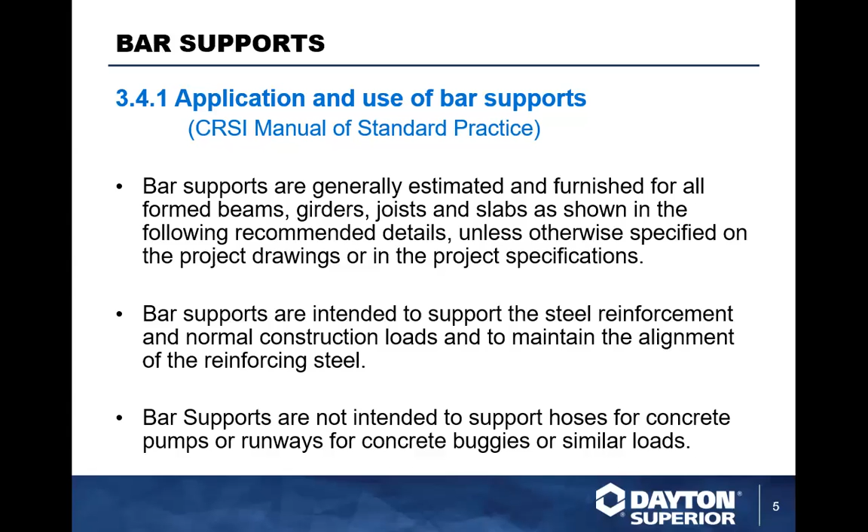Bar supports in place. Typically, you're going to want to make sure that you have a bar support going in place that can support the bar in position and can be tied off. And two, that it has openings in and around it to allow concrete to flow freely in and around it, so you don't get any honeycombing in and around the product.

So you want to make sure that you fill all the voids around the concrete, because you don't want water to accumulate there. And on days like today, if you're in the northern half of the country, you'll understand what I'm saying. Because if water's in the concrete today, it's ice, it's frozen. And when water freezes in the concrete slab, it does create a major problem.

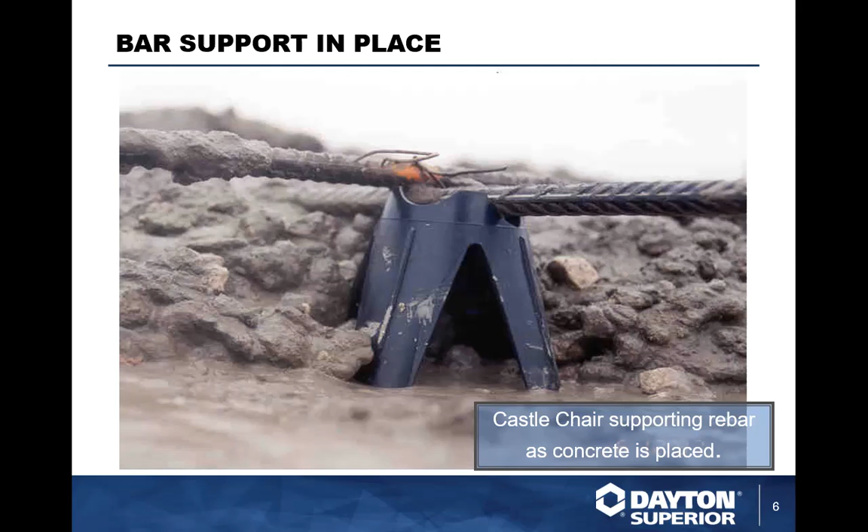So you've got composite bar supports being used in pretty much most of the projects here. Composite bar supports actually started becoming a major item back in the 1970s, when mostly it was all metal bar supports that were used, but because there were problems with getting steel, etc., plastic actually started coming in.

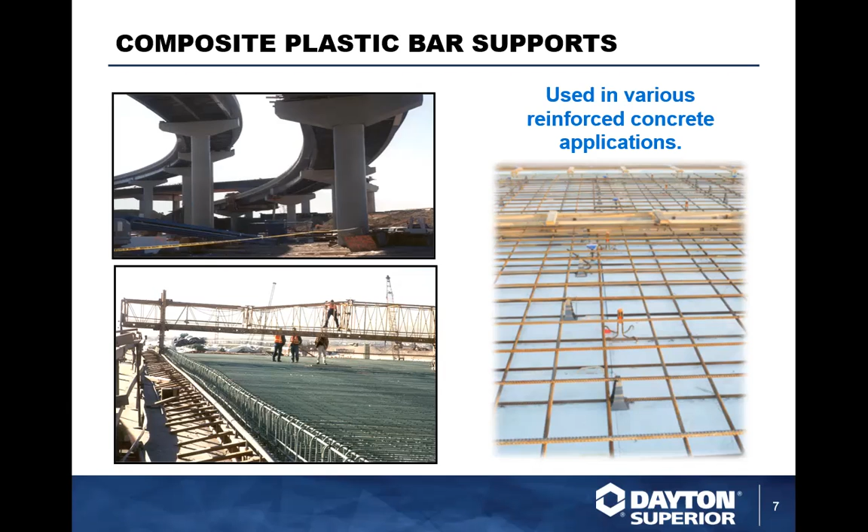And the plastic bar supports are, I'm going to say, as good as, if not better than, the metal bar supports. There are a couple of different reasons for that, and we're going to talk about them. They're non-corrosive. You don't have to worry about them rusting. If they get knocked over, no harm done.

They can be a little more expensive, but they can also be a lot less expensive than, let's say, an epoxy coated plastic dip material or even epoxy coated. One of the great things is they are a concrete gray in color.

They are lightweight. If you ever watch an iron worker carry out bar supports onto the deck, they will typically grab a couple hundred feet of metal bar supports in their bundles and carry them out.

Plastic bar supports enable a guy to grab like 600 or 700 feet of bar supports if he can carry all the boxes and carry it out. The biggest problem they have is getting rid of the cardboard box at the end of the job.

One of the great things about plastic bar supports is that it's recycled material. This material is that old milk bottle, that old water bottle, that old soda bottle that you had running around.

You threw it into the recycle bin. This material typically has basically found its way back into being recycled, repurposed into a bar support.

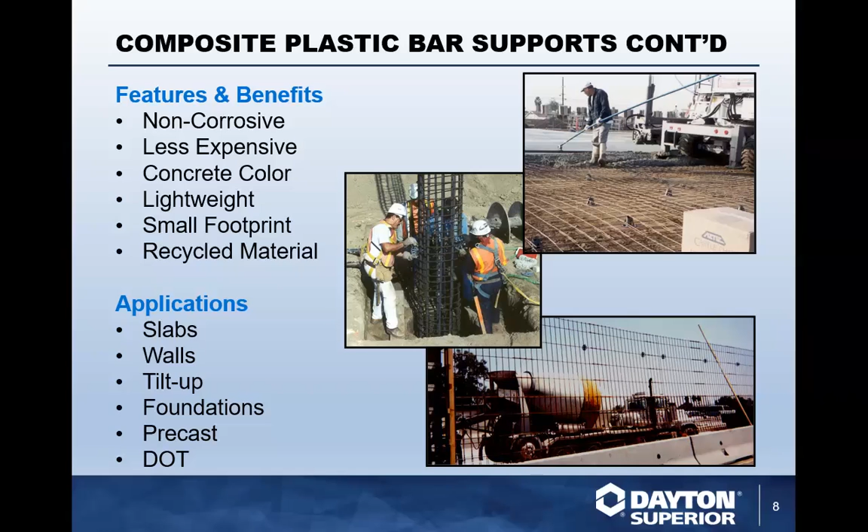So with Aztec, Aztec's been around a long time. Dayton actually acquired them in the late 90s.

Aztec Plastic Company out of California was a manufacturer primarily of about 10 or 12 different Aztec product pieces, and some of those are still in existence today.

The easy chair, tower chair, castle chair, paving and sand chairs, X chairs, and as you can see, the list runs on. We've got easy lock wheels, plastic slab bolster upper.

Slab bolster and beam bolster. We also have easy lock slab bolster, and we have concrete dobies that also fall under the Aztec product line.

Dobies, for those of you that are not familiar with it, are big hunks of concrete blocks. They're very, very heavy.

And they typically can have a wire connected to them or little knockouts in them where they can hold the rebar in place.

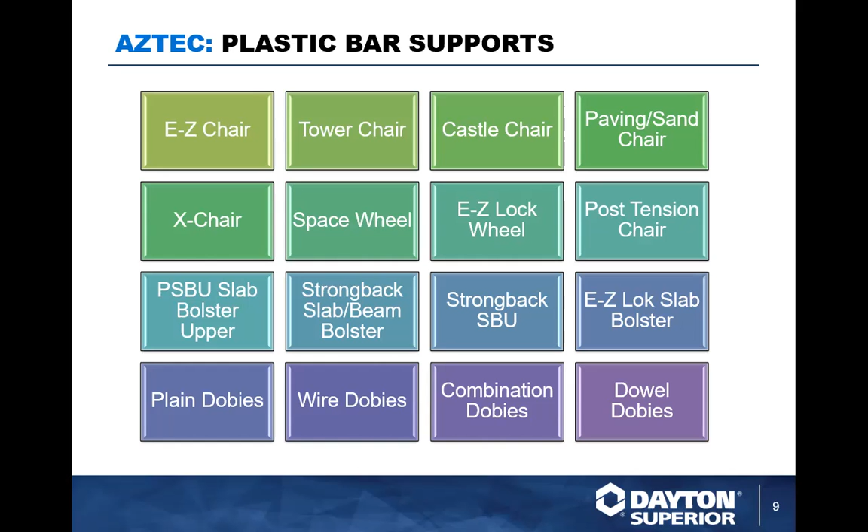So what size support should I use? Usually an engineer will specify it.

The engineer will specify what concrete coverage he wants from the floor surface to the bottom of the rebar. When this comes through, that is typically the coverage you have to have.

So if you order a chair right here, 3 1/4, the chair will go in place and support the rebar 3 1/4 inches off of the sub-grade.

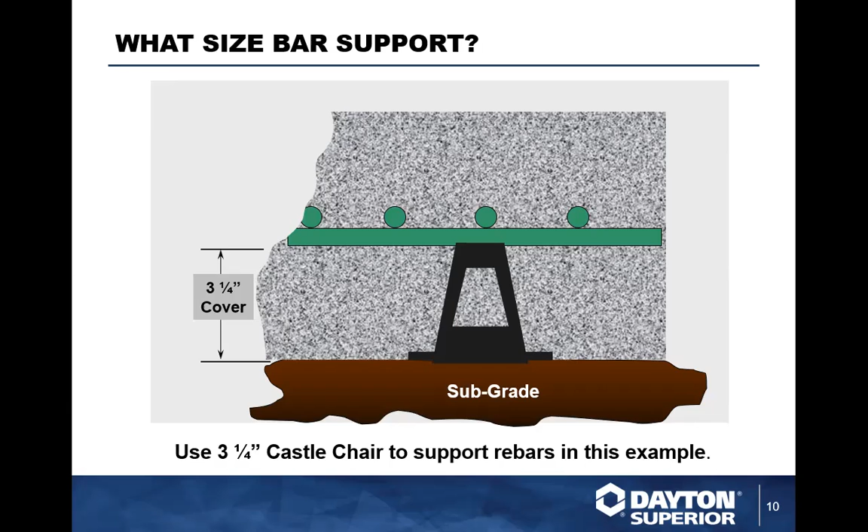Now, for that, our best seller that we have is the Castle chair. It's typically an on-grade single mat rebar chair or wire mesh chair.

The bottom layer actually has a wide base on it, a circular base, about 1 inch to 1 1/4 inches wide, and this enables you to give a good support to that chair.

So it's a great chair for when you're having slab on grade or concrete fill. It's available up to 6 1/4 inches in height, in 1/4 inch increments.

The other great thing about this chair is it's dual sided. So basically, if you have 1 1/2 inches on one side, you'll have 1 3/4 on the other if you turn the chair 90 degrees.

So basically, you can get one chair that will do two different sizes.

It depends. Basically, all you have to do is just rotate the chair 90 degrees, so it depends on how you want to turn the chair.

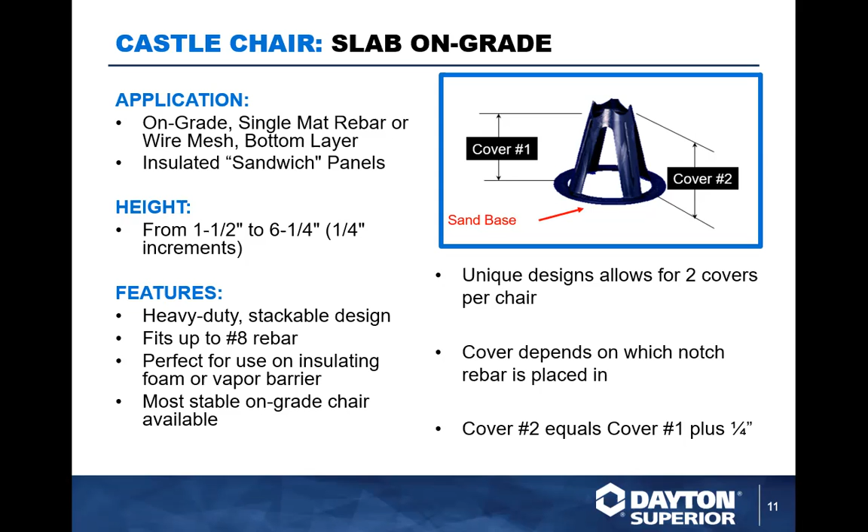What it does is, right at the intersecting points where the wire mesh intersects, you can actually put this chair and attach it to the wire mesh.

If you have to move the wire mesh for whatever reason, you can pick it up and the chairs will stay attached to the wire mesh. This enables you to basically pick it up, say you're doing an elevated platform and you've got wire mesh going down, but you've got to either put something underneath it or oil it or use form release.

With that product, you can pick the wire mesh up, move it, and then bring it back and set it in place, and the chairs are all ready to go.

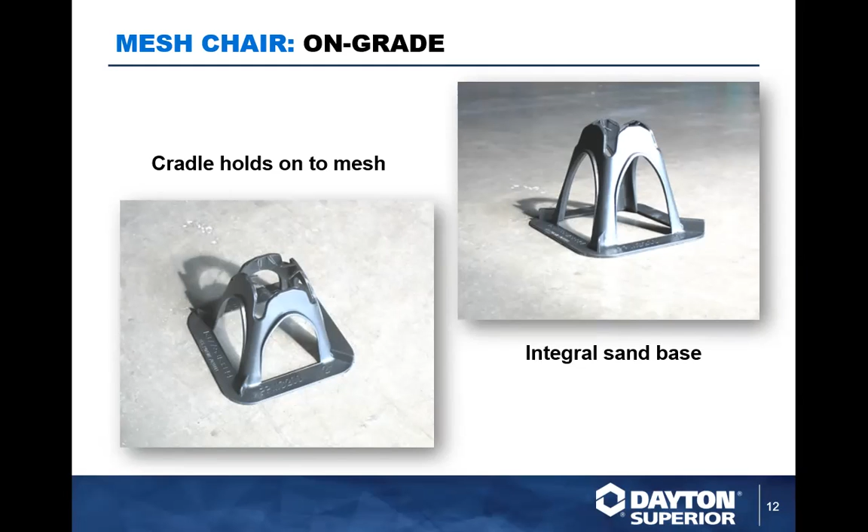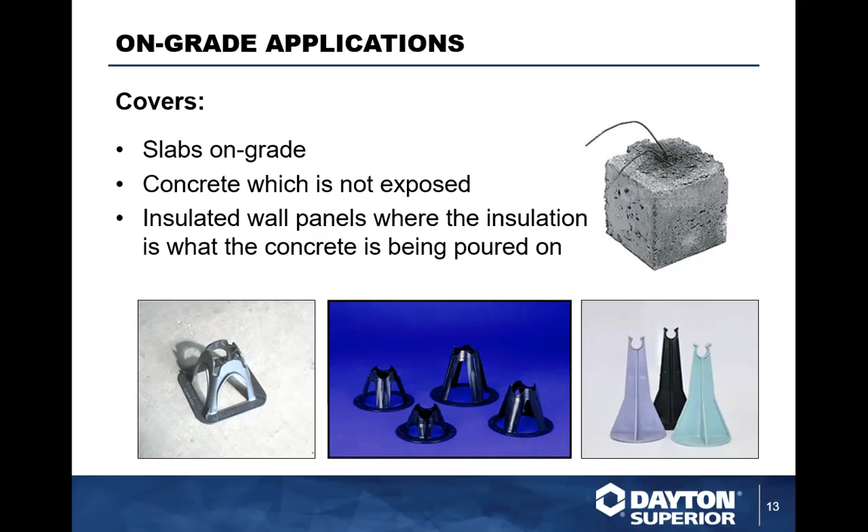Also have concrete dobies. As you see, any of these on-grade applications, concrete dobies on the West Coast and actually in the south central part of the country are becoming more and more popular. Basically, it is a concrete brick, a sand and shale mix, concrete mix, either with wire or without wire, and basically will support your rebar. We've actually used this in conjunction with a lot of our plastic chairs to accommodate, depending on what size rebar, etc., are going to be required.

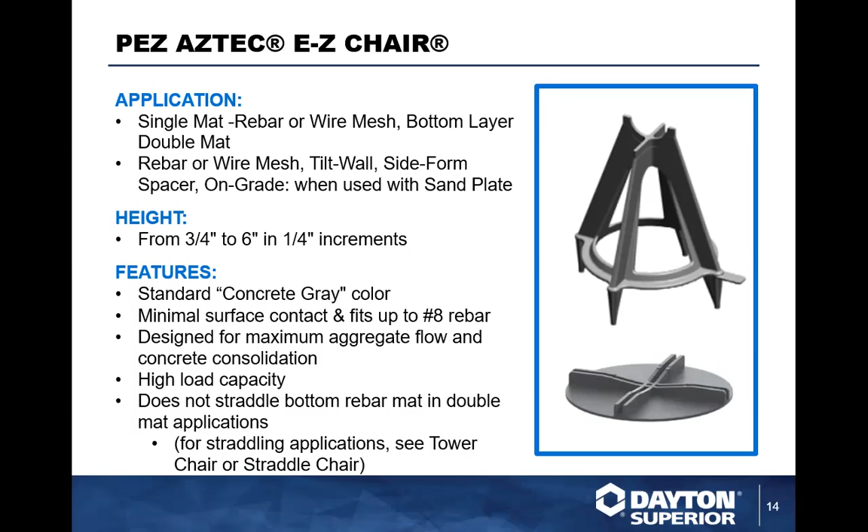Now, if I look at a lot of the plastic chairs, the E-Z chair is probably one of the most legendary chairs in the marketplace. This chair has been used for 45 years by bridge contractors, high-rise developers, anybody pouring multi-floored projects. Bridge contractors typically like it because they can use it out on the fascia of their overhang. It has a very small footprint, it's concrete gray in color, and this chair has extremely good concrete load bearing, it'll withstand loading in this chair. You can also get this chair with a sand base if need be.

The Aztec chair, this chair here is one of the strongest chairs in the marketplace. Single mat or wire mesh bottom layer can be straddled because of the design of the legs on this system. This tower chair here, actually when I first came on board with Dayton Superior at the World of Concrete, we were showing Aztec in our booth, and we actually had a brand new pickup truck sitting in the middle of our booth with 4 of these chairs supporting the pickup truck. So that's how strong this chair is.

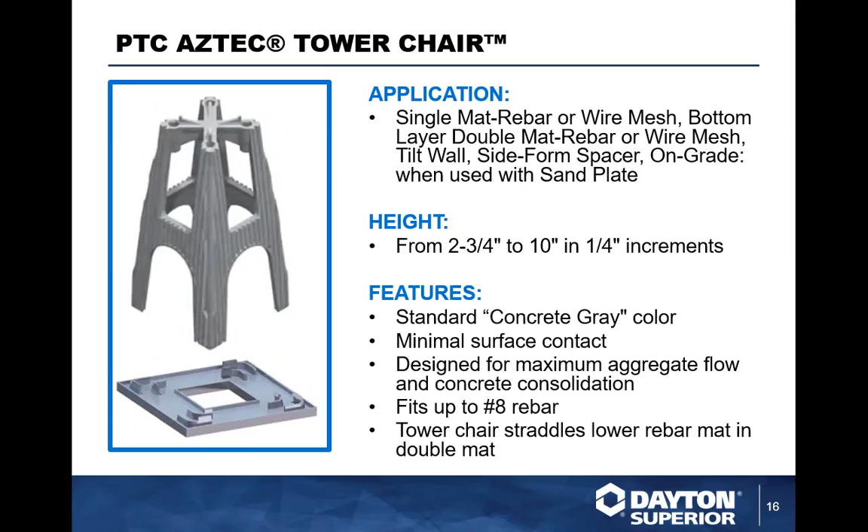This chair here has been load rated somewhere in and around 700 to 800 pounds in ultimate strength. In our office here, we like to say that it passes the chuck test. Typically it's standard gray in color. You do have a sand base with this also.

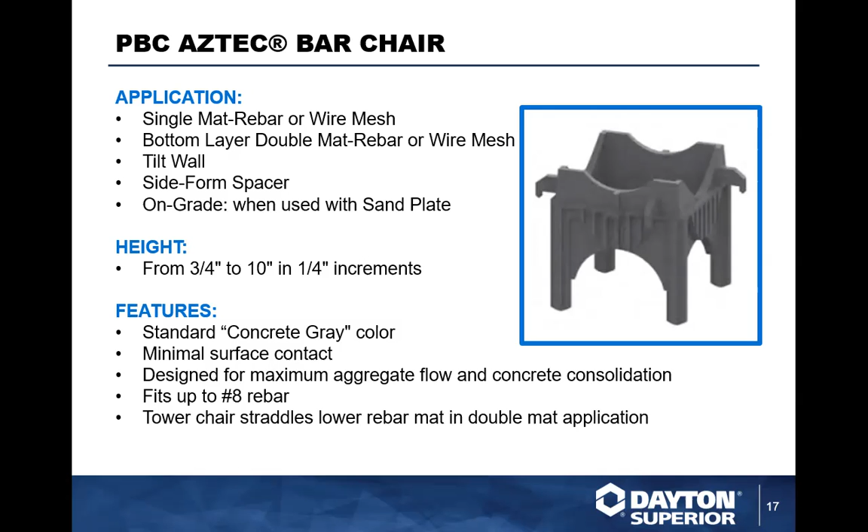You can also have the bar chair, which will actually attach to the top of that tower chair to get an extra 3/4 inch to 10 inches. You can also use the bar chair as an individual freestanding chair. It is dark gray in color, with minimal surface contact, so once again, very small footprint. And you can see here it's accompanied with the tower chair to actually accommodate.

Where we see a lot of this being used is when we have slope slabs. So parking structures, etc., where the concrete may vary in thickness, the slope slab will actually take into place different elevations of the rebar. So instead of changing all the rebar chairs, you only have to change the one top chair.

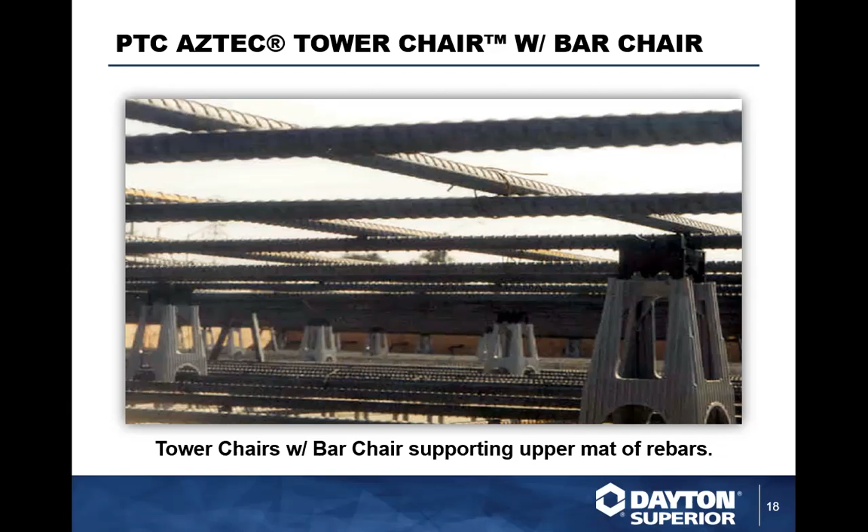For the paving contractors, we have paving chairs, which typically will grab hold of one rebar. Since all the rebar mat is connected with it by tying it, you can actually support multiple pieces of rebar with this one chair. Typically, these are going to be spaced somewhere in the range of about 3 foot on center. You can get heights up to 9 inches in height, which makes it ideal for concrete paving.

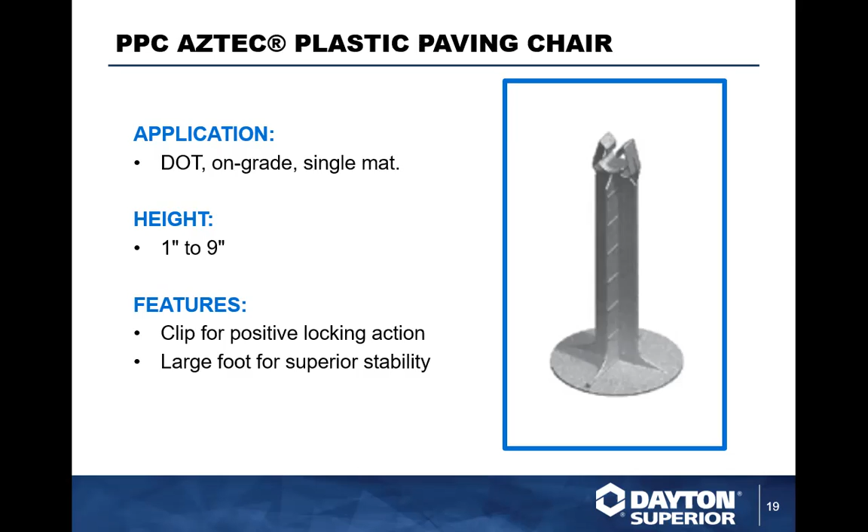We also have a snap-on mesh chair. We see a lot of these being used, similar to our other chairs. The R22, a lot of this is contractor preference. This one here has a solid base on the bottom, still clips right onto the wire of the wire mesh. Can get up to about 6 inches in height. We see most commonly somewhere in the range of 3 to 5 inches as our maximum usage products. So we see a lot of these being used in our sidewalk construction.

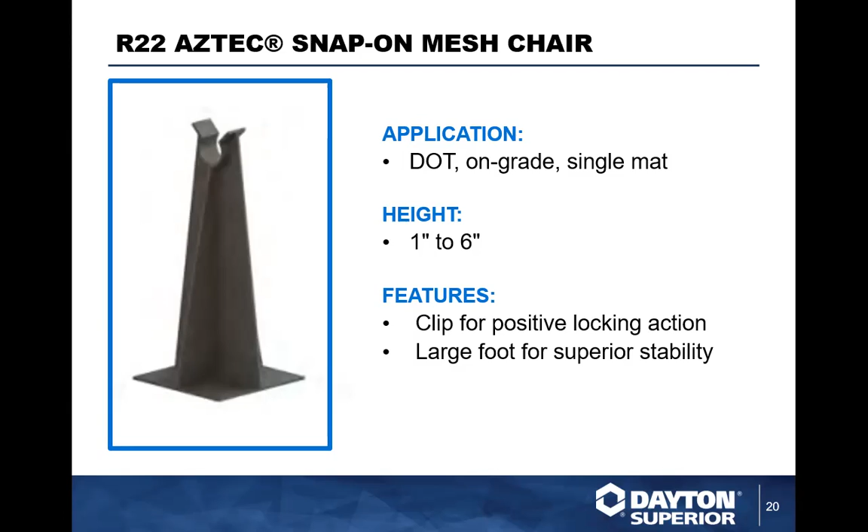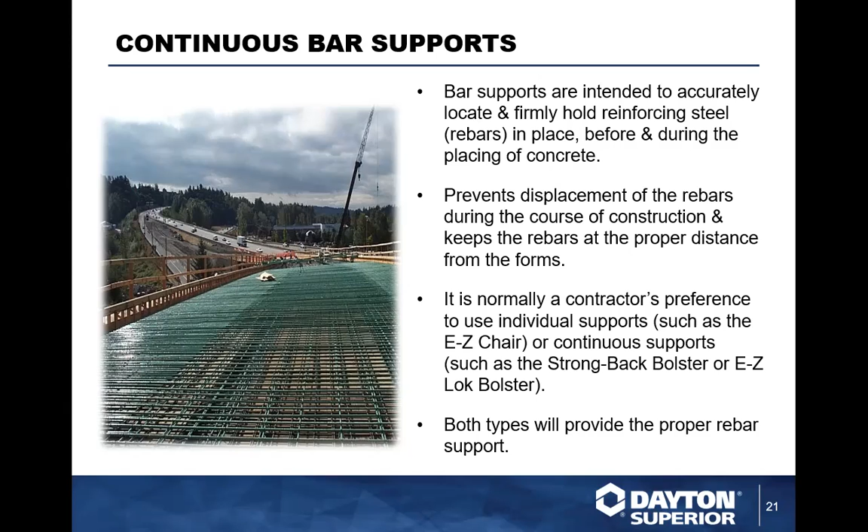Continuous bar supports basically are intended to accurately locate and hold reinforcing steel in place. The rebar is kept because it's now going to be a major component within the structural slab, being your bridge deck. So normally the contractor's preference is to use individual support such as E-Z Chair on the fascias. But for the rest of the deck, most contractors prefer to use a continuous slab support, which is just a long bar support. If it's in a plastic mode, it's 2.5 feet, whereas if we're talking a metal chair, it's 5 foot in overall length.

So we have our Aztec strong back slab and beam bolster. Typically, this is for an elevated slab, typically 3/4 to 3 inches.

Typically, we can support up to number 10 bar on this chair. The biggest problem you have is when they drop the bar on the chair. Plastics typically don't handle a high impact load well. If you place a heavy rebar on this, you're good, but if you drop it, you may have a problem.

Cold weather or hot weather instances can also lead to that issue. But most of the blends we use with our cold injections have eliminated the variances we get with cold weather and hot weather.

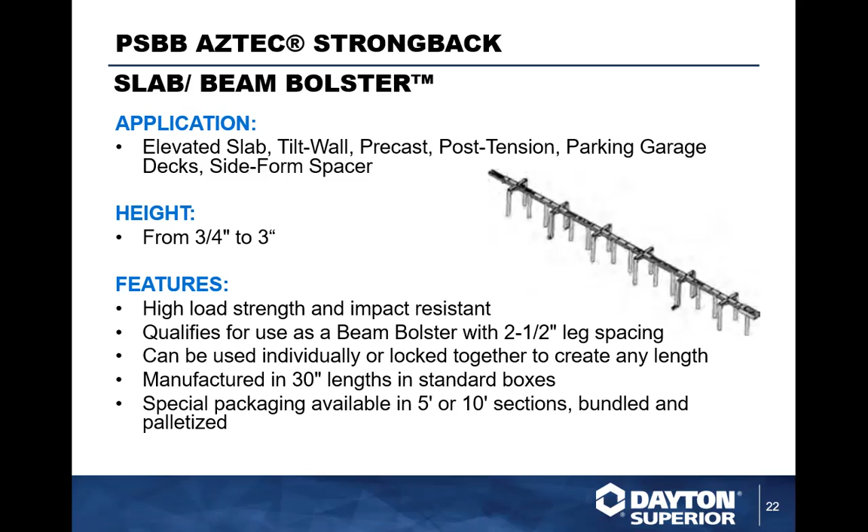Slab bolster upper, typically up to 5 inches in height. This is an extremely strong slab bolster upper material. The base allows you to span your SIP decking or top mat of rebar.

You can also connect these continuous bar supports - Aztec is a great product because they all have clips on the end. One end has a receiver, the other has a clip. You basically punch the two together and you have one continuous piece.

Now on metal bar supports, when you're estimating, you typically have to add 10% for lap length. With plastic bar supports, you have 0% to add for lap length. So whatever true number you come up with for what you need, that's the number you use - you don't have to add any extra for lap.

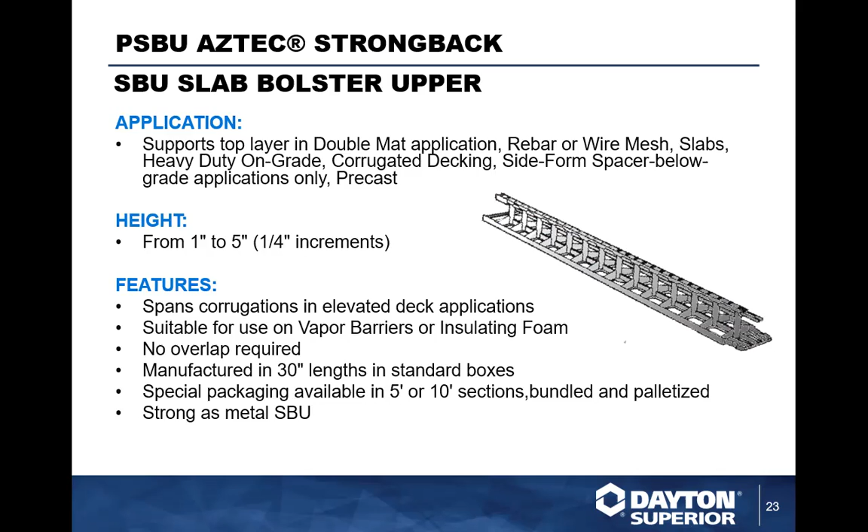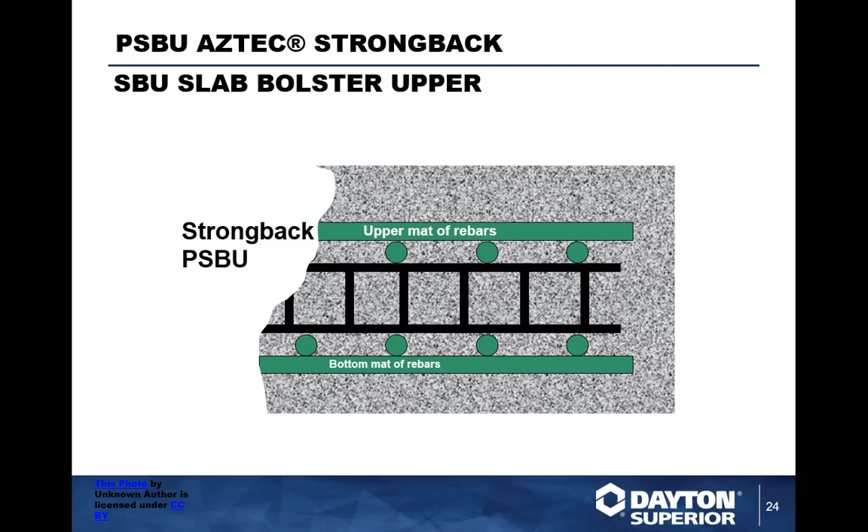So for slab bolster upper, typically you're going to have your bottom mat going in place here. A lot of times the bottom mat may have individual chairs. The upper mat will be supported with an upper material, basically to suspend between the two pieces of rebar, or it may be supported on an SIP decking if it's a bridge deck.

Typically it will slide onto the piece of rebar and make the connection. The one problem you do have with it is if you hit it just right, it will fall off, because it's designed with that clip to be able to be taken off and moved if needed on the project.

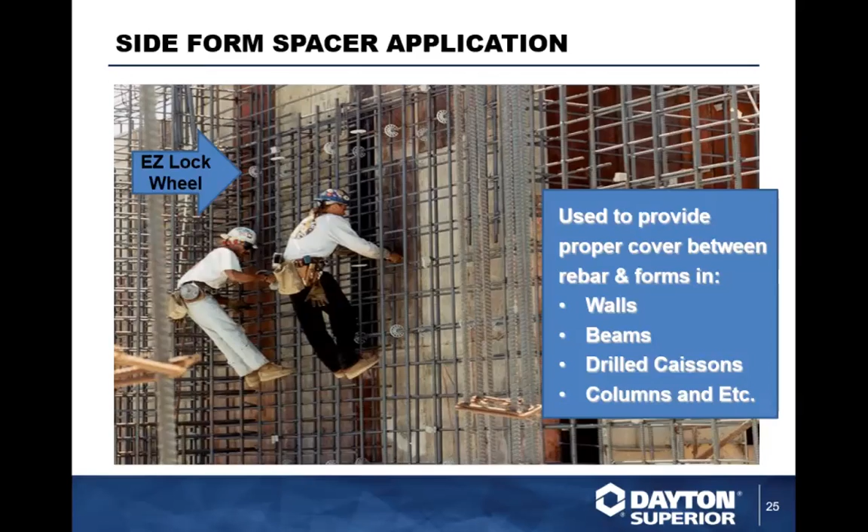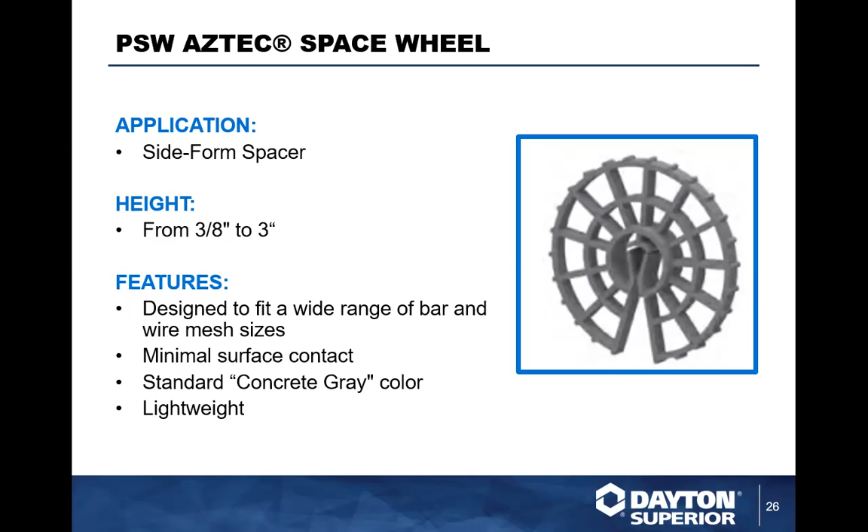Now we've got the E-Z Lok wheel. This is a much stronger unit. It has a locking mechanism, so once you wrap it on top of the rebar, it is connected. It comes up to what we call a height from 1.5 to 6.5 inches, depending on bar size.

And it's from the edge of that cage right around the center of it - once you make that connection, that edge distance is from that edge to this outside edge.

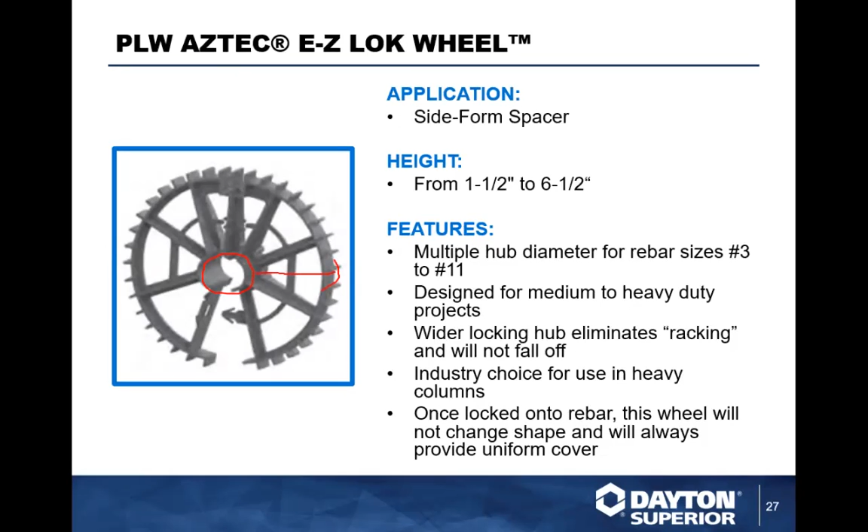You should draw a picture of a flower too. Yeah, or a Ferris wheel - that's what those remind me of.

Concrete dobies - basically concrete mixed with shale used to make concrete bricks. Typically we see them in the South Central and the West Coast. Primarily the reason we don't see them anywhere else is that's where they're mainly made, and freight on these is astronomical, so they typically stay close to where they're being manufactured.

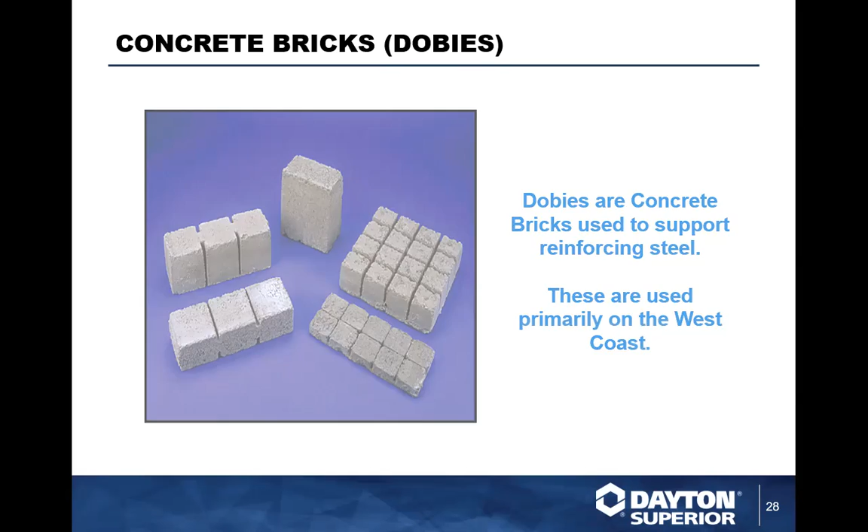But they have a couple of different sizes and styles. We have the plain dobie, a combination dobie, wire dobies, and dowel dobies. The most common ones you see are the plain dobie and the wire dobie.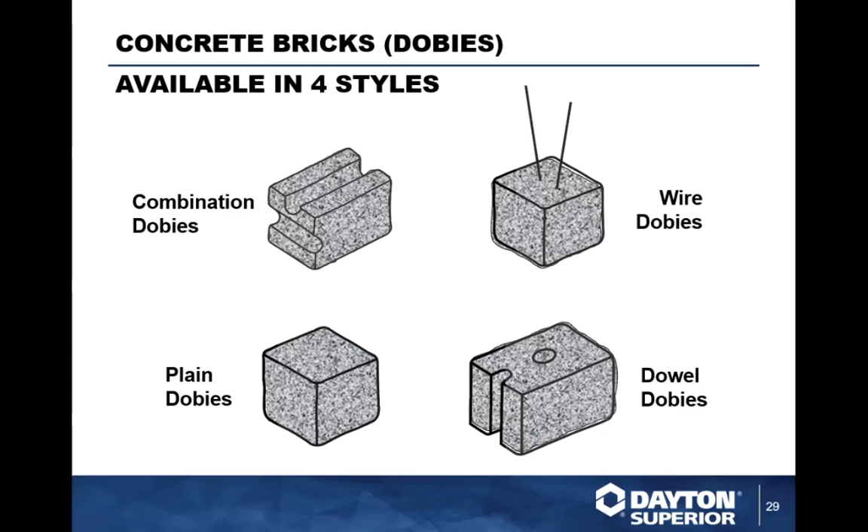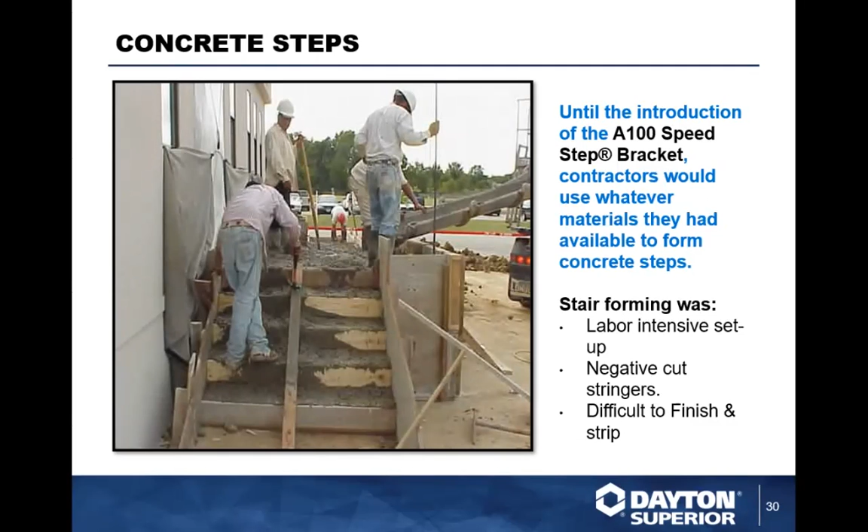One of the other things Aztec has is our Aztec speed step. Typically for designing steps, forming up is probably one of the more cumbersome processes on a construction job, so this enables you to speed up that process going forward.

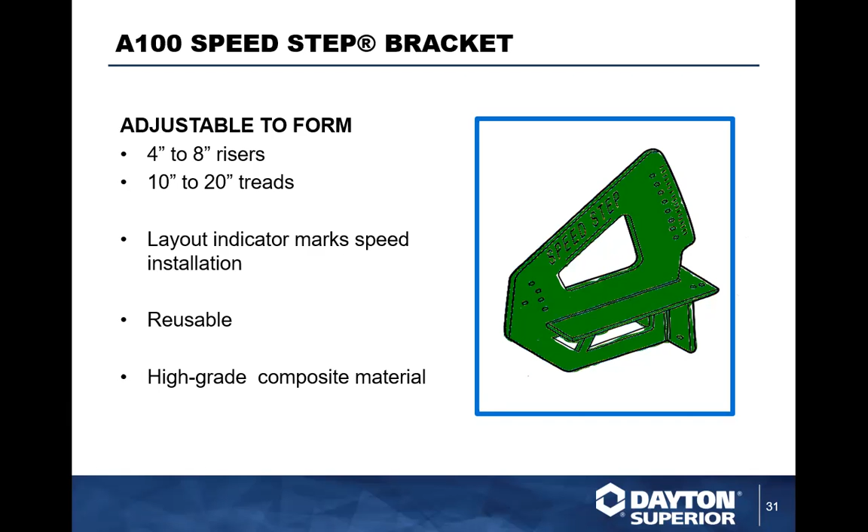You can have rises up to 8 inches on a riser, 10 to 20 inches on the treads, without an issue. It is fully reusable. It's a high-grade plastic composite material. It does make the construction or forming process a little bit quicker and easier.

So when we're talking about connecting here, we're going to connect a main line board that runs the gamut of the steps from top to bottom, and you're going to put a center line on the board. This is going to make the connection.

Once you make the first connection, you'll notice there's a gauge on it. You mark those at your numbers on the gauge - that's going to be the same one when you go to the next step up. So it's a repetitive process moving forward.

And it does help with the stair run and rise, and you can actually attach a kneel board on top of it so the contractor can kneel on it while he's finishing his stair rise and run. That enables everybody to increase their productivity when they produce a step situation.

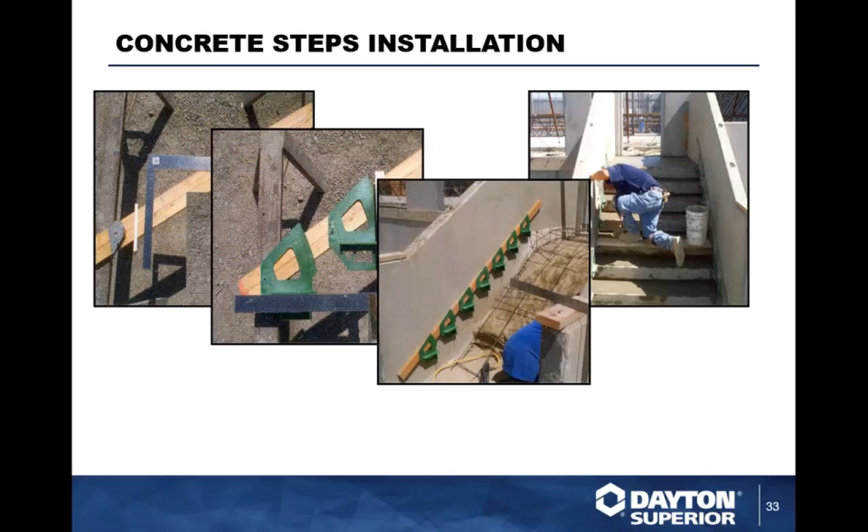Here we've got full guidelines on how it actually goes into place. You can see how it lines up here inside. Then they just attach their rise boards and start pouring concrete from the bottom, depending on the contractor. Some pour from the top down, some from the bottom up. Myself, I like to pour from the bottom up, keep working my way up as the concrete keeps pushing down, keep troweling it off and ready to go.

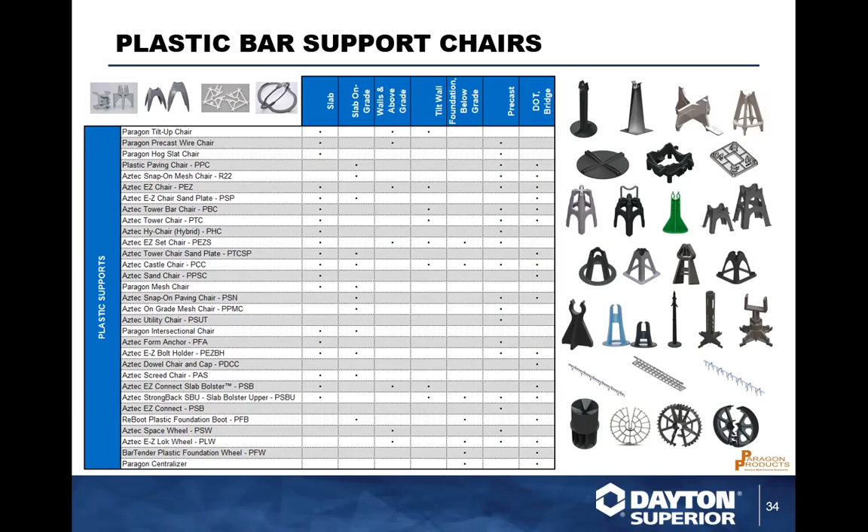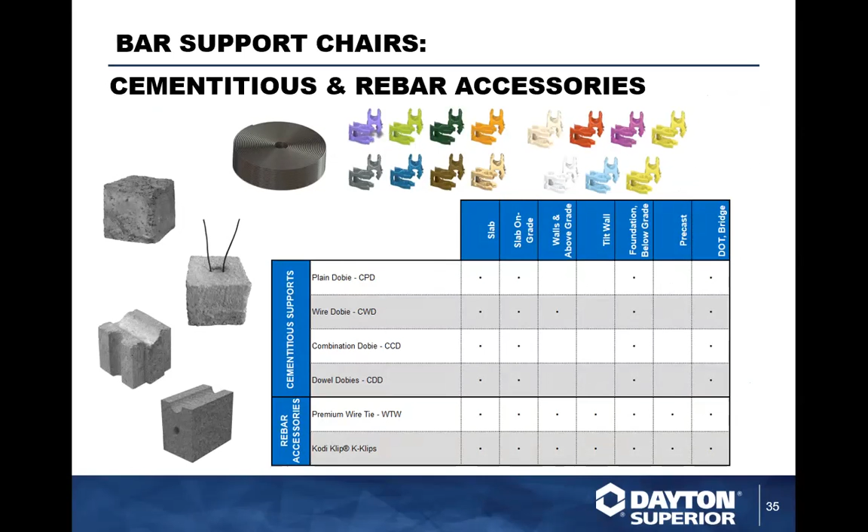Now, we tried to make life a little easier for our customers, so we put out this great little spreadsheet. It's in our bar support handbook. Depending on your application, you can look at it to see what chair is recommended for that operation. We've also got cementitious bar supports, whether it be a dobie, our Kodi Klips, or tie wire that's out there available for us, wherever you think you may end up needing it.

And obviously we've got resources available. You can go to DaytonSuperior.com. You've got product pages, technical data sheets, safety data sheets, handbooks, and more. Our supports are actually listed in every handbook, just a blurb on them. If you're looking for a little more detail, get a hold of the bar support handbook. That'll give you more data including in there.

And as Heidi talked about earlier, at Dayton we are a one-stop shop for training, product, engineering, whether it be accessories or chemical.

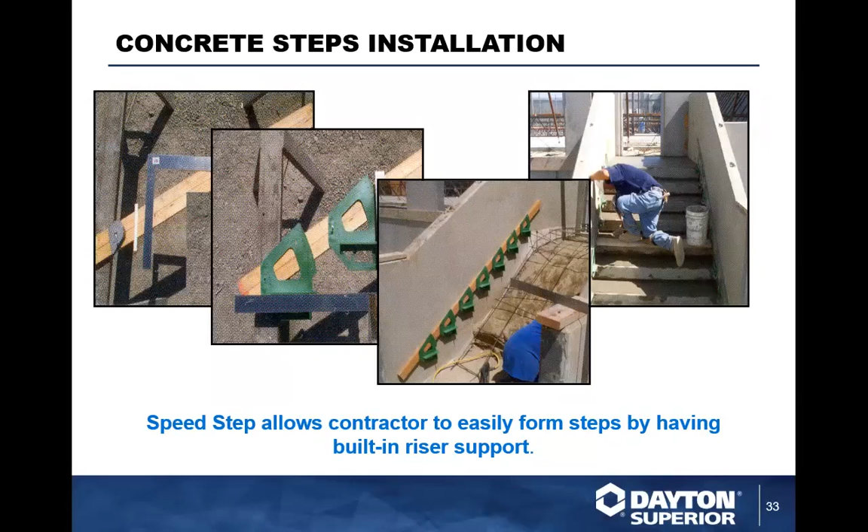Yeah, let's see if I can find it. Here it is—but it's the A100, one slide before. Ooh, pretty. There we go. So hope that helps you out. You're welcome, April—or Alan, I'm sorry, April asked that earlier. Anybody else have questions?